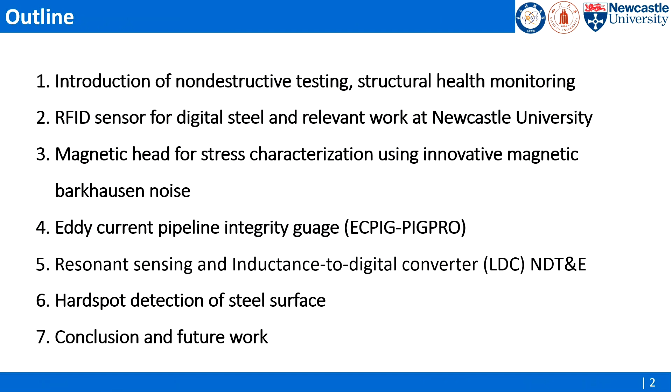So basically, NDT and structural health monitoring is probably new for this community. I will talk about roughly what this is about. I'll talk about the RFID sensor we developed in Newcastle, and then how we could use it for digital steel and the tracing and tracking of steel quality. I will talk about different electromagnetic sensors for different applications, like stress and pipeline applications, and also about metrology and NDT merged together for future quality control.

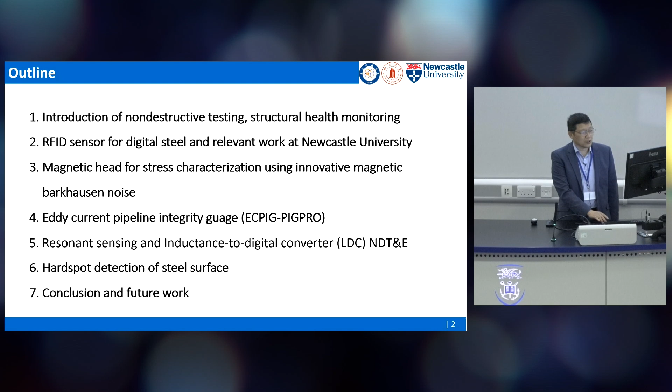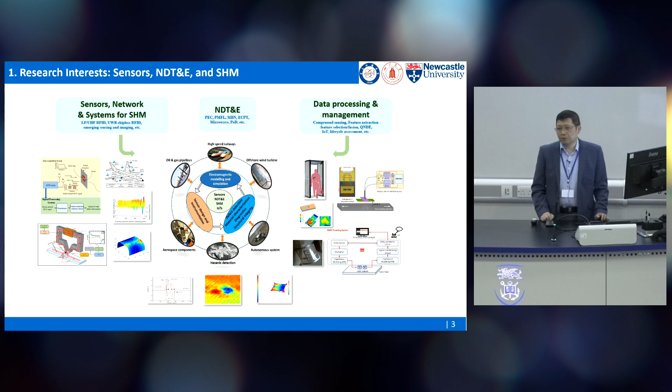So, as I said, I'm from Newcastle University. We have a sensor, signal processing and communication group. I'm actually in charge of the sensor theme. In the sensor theme, we develop different kinds of sensors for non-destructive testing and evaluation, also structural monitoring and IoT for network monitoring. After that, we develop instrumentation, modeling, and systems as well. Then we develop different applications, like high-speed railway, wind turbines, steel manufacturing, and oil and gas, particularly for power plants. As you can see, most of the end use is for metallic objects, steel in particular.

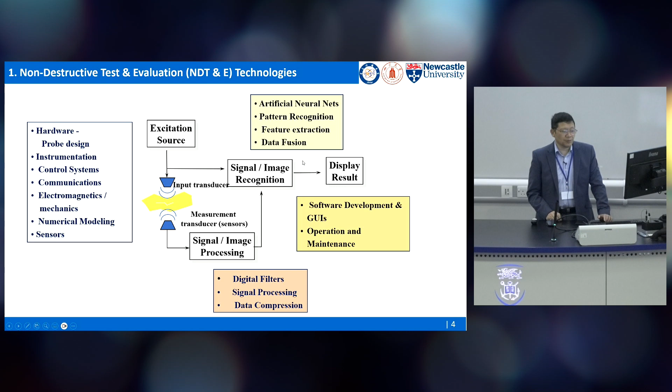So what is NDT about? If you go to hospital and have a check, we have ultrasonic, we have X-ray, we have different measurement and diagnostic systems. So it's very similar. NDT is like a measurement, with only one big difference: we have the excitation source. For example, with X-ray you have the X-ray source, with ultrasonic you have an ultrasonic source, and with MRI you have the magnetic field generating the excitation. So NDT has excitation. After that, we have a sensor, signal processing, pattern or data processing and decision making. The rest is very similar to the instrumentation and measurement area.

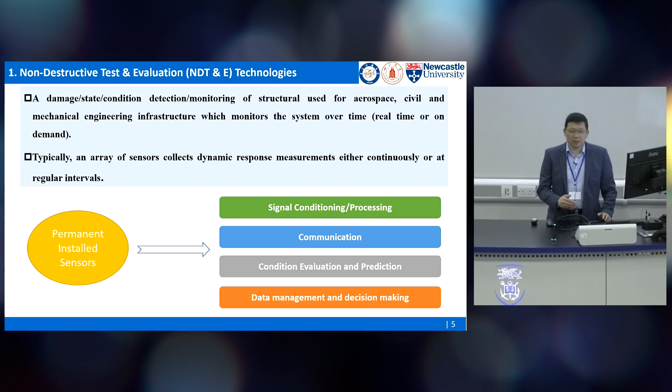Structural health monitoring actually extends NDT application to permanently installed sensors. Basically, we install sensors on different objects for continued monitoring. We could also call it in situ monitoring. In this case, we don't only have a sensor, we also have communication to send the data to the place we would like to use it.

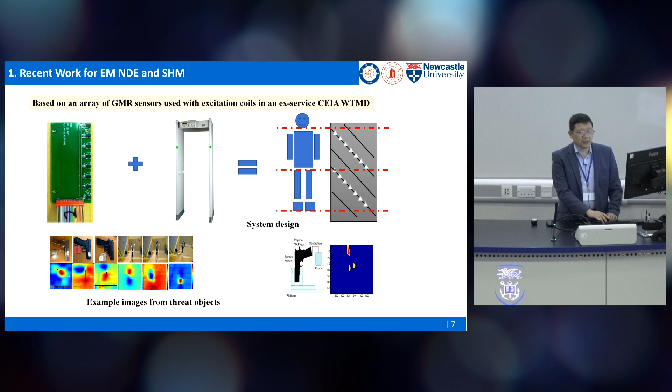One example application is the walk-through at the airport. We have the magnetic camera, and we also associate it with different metal detectors for the walk-through system. In this way, we can monitor any metallic object. So you don't need to take out all the metallic goods when you go through the walk-through system at the airport. We can just detect and localize different metallic objects and then make the right decision at the right time.

In a similar case, we can apply this to pulsed eddy current. Traditional eddy current just uses a single frequency for excitation. What we do differently is pulse, because with pulse excitation we have the time and frequency domains combined together. Then we do the measurement without defect and with defect, and use the differential signal for feature extraction. After that, we developed different pulsed eddy current sensor systems at Newcastle University. We use this for corrosion detection under coating. We also developed flexible eddy current film for complex geometric applications.

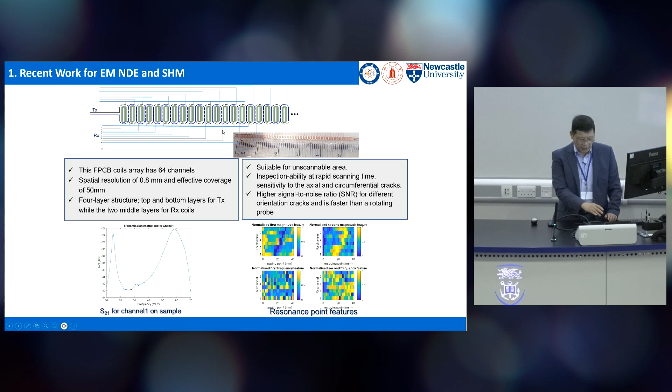And this one, as you can see, is a flexible coil film. We can measure different kinds of defects as a sensor array.

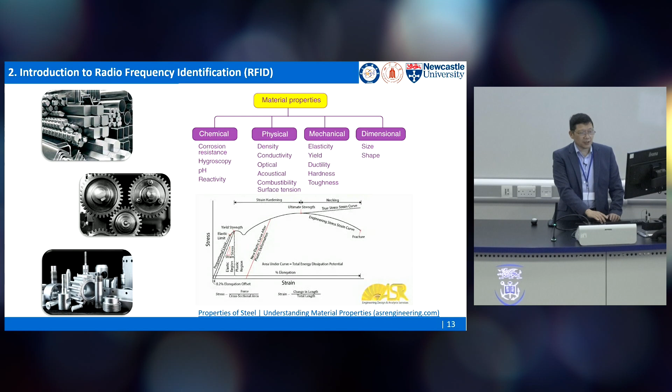One of the interesting areas I think the audience may find interesting is the RFID sensor we recently developed. For steel material, we have quite complex parameters there, physical, chemical, mechanical, or geometric information. So what we could do is develop different kinds of sensors. One of the sensors, we use RFID.

RFID is not new to everyone here. You have a bank account, you have a staff card. That's why you have two parts: one is a transponder, another one is a reader. Normally the transponder, the card we hold, is passive, no power required. When we reach near the reader, the reader coil will excite and inject energy into the transponder, and then the transponder wakes up, gets the power, and then we can use this kind of switch to get a different ID, and then we get the different identification and communication, like near field communication.

What we do differently is we try to bring these two characteristics together with sensing. If we have sensing, because the transponder and the reader coil exactly use what we call inductance or eddy current, if we extend that, we could apply this to measuring steel property. And then we also can stick a transponder with steel material or with a sample for tracing the supply chain and tracing manufacturing. So if we put it this way, we have different applications.

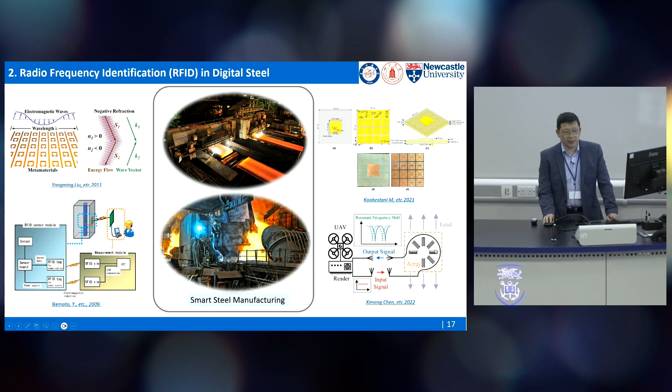For example, we could use a metamaterial with print and coating on steel material or steel sample. We also can design different RFID sensors to do stress measurement. One of our applications in Newcastle uses a quite wide range of different RFID frequencies. We do corrosion detection under coating using low frequency RFID, high frequency RFID, or even ultra high frequency RFID for different sensing applications.

One recent approach is we also try to use commercial off-the-shelf components. Basically we can purchase RFID components on the market, and then this kind of flexible RFID device we can stick onto steel material. As you can see, we can have different shapes, sticking with steel material. In this way, we can detect the coating condition and corrosion condition. We also can measure the steel material property, and in this way we can get a digital mark for the steel material.

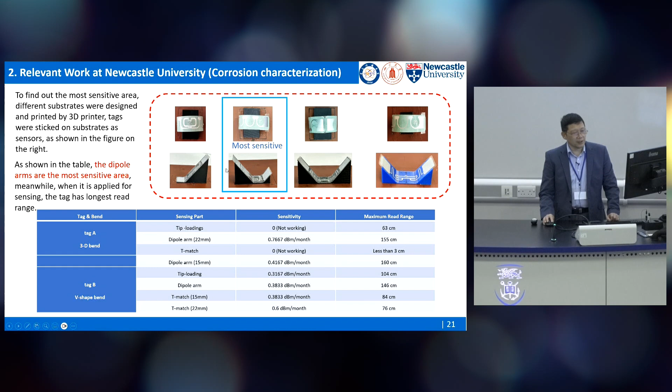So this one, as you can see, we purchase this kind of RFID flexible device from the market. We just design the electronics and do the data acquisition remotely, and then, depending on the communication distance, we can get different sensor information.

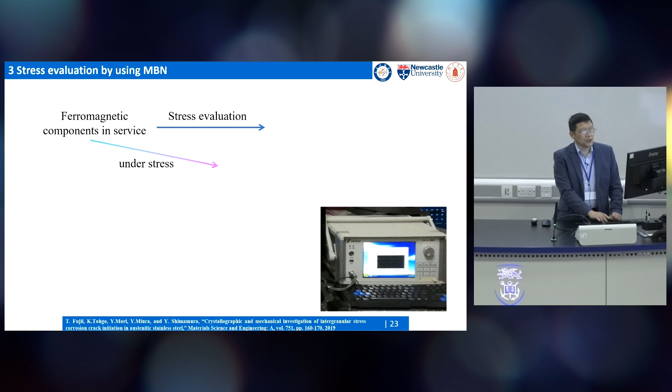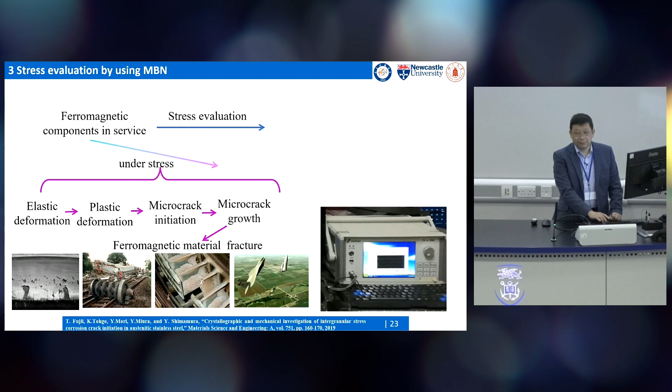We also can apply magnetic Barkhausen noise for stress measurement. So we developed one instrumentation system using magnetic Barkhausen noise, just measuring the elastic or plastic deformation, measuring microcracks or microstructure, and in this way we can measure the steel material property. This is a typical electromagnetic probe approach here.

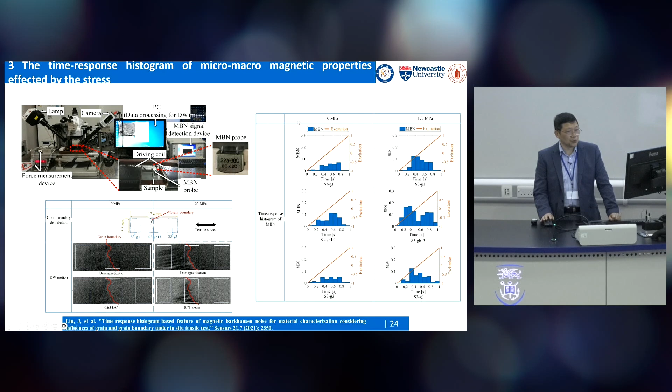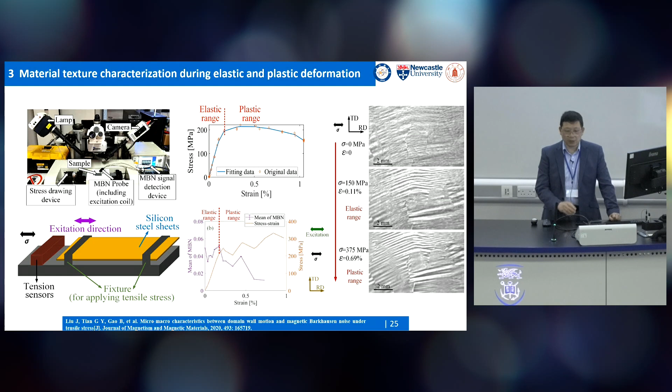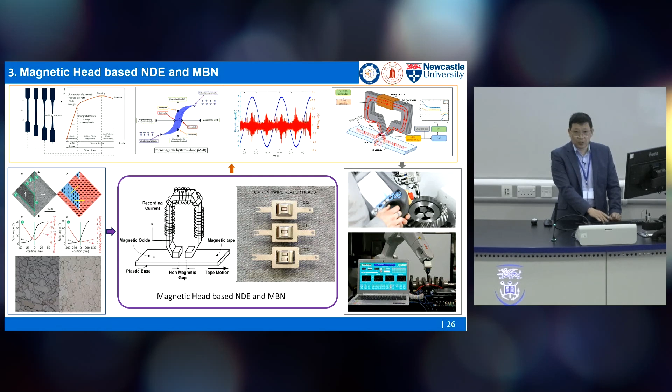So what we did, first of all, we changed the traditional way to design the probe. We didn't use the simple yoke and sensor system; we applied a magnetic tape-type head. Previously, some people can probably remember this kind of tape head, which gives a very tiny reading area. In other words, we can get a high spatial resolution to measure the stress, because stress actually has both macro and micro stress there. In this way, we can improve spatial resolution and get the measurement right.

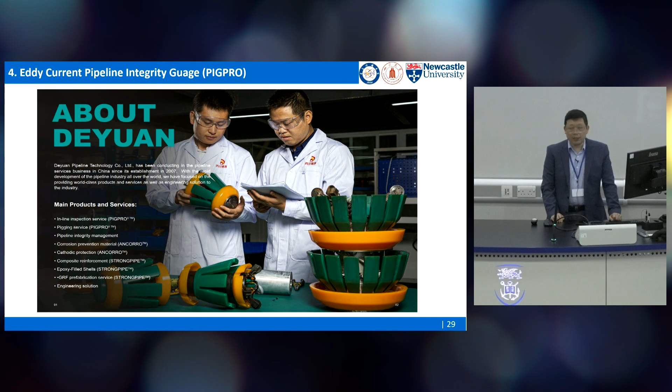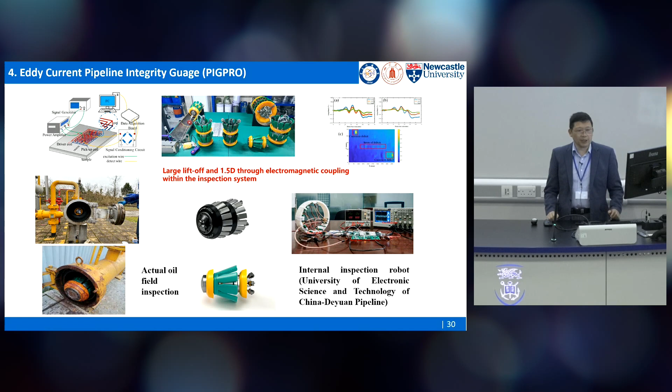Another one, we just use eddy current pipeline integrity for pipeline measurement. This one is about operation and maintenance. I'll show you this one is a spin-out company we're working with in China, and currently we've already measured globally around 150 pipelines. What is the beautiful part? Because the eddy current pipeline tool can make the pipeline integrity inspection device much smaller. And this is the application there, so probably I'll show you the video.

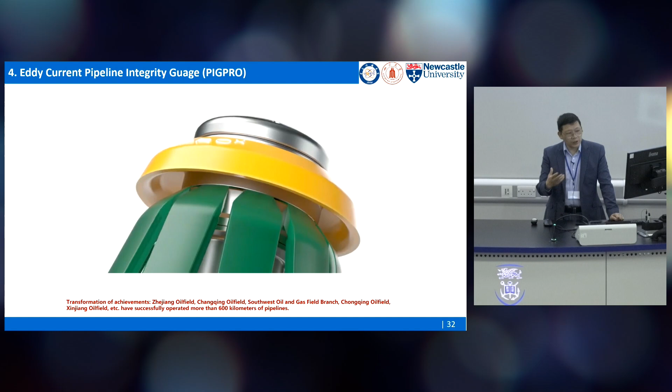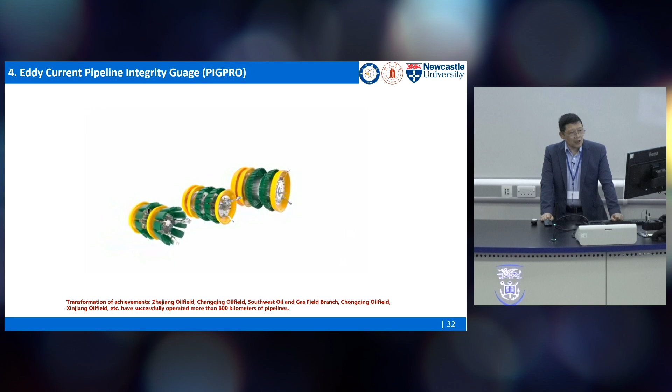The traditional approach uses magnetic flux leakage, which is a big system, and that's fine for long distance pipelines. But for branch pipes, the pipeline is small, for example less than half a meter in diameter, so it's very difficult. Then we use eddy current, which gives us very good sensitivity and a compact system.

The benefit is that eddy current sensors offer higher sensitivity and signal to noise ratio. They can detect inline defects including inner metal loss, abnormal welding, cracks, pinholes, deformation, and illegal taps, etc.

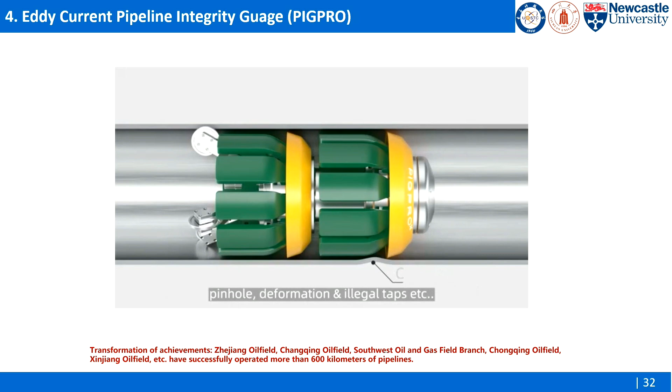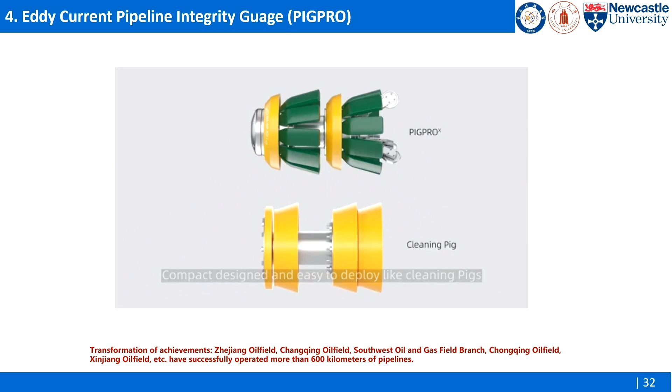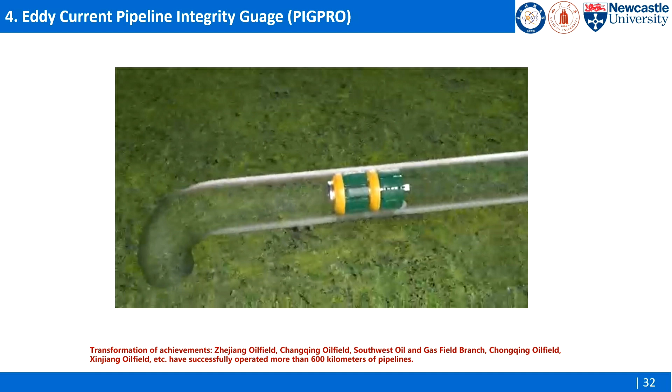It has a compact design and is easy to deploy, like cleaning pigs. It can be deployed using non-standard, standard, or temporary launchers, with valve launching. It can pass a 1.5D bend, so even with this portable system it can still measure, or with a 20% deformed pipeline.

It can be driven by as low as 14.5 psi pressure difference, with an ideal running speed ranging from 0.1 meters per second to 8 meters per second. It suits conductive pipelines, including carbon steel, stainless steel, and bimetallic composite pipelines.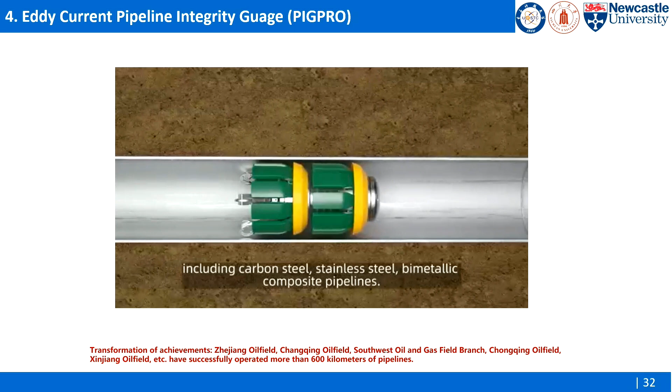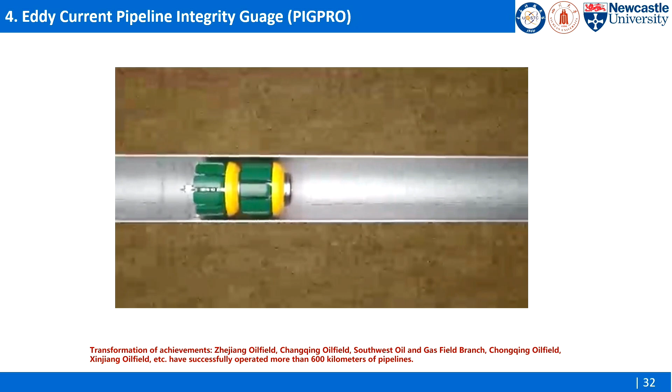We can also track the pig system in the pipe and get location information. Then after finishing the inspection, we can take the data out for decision making.

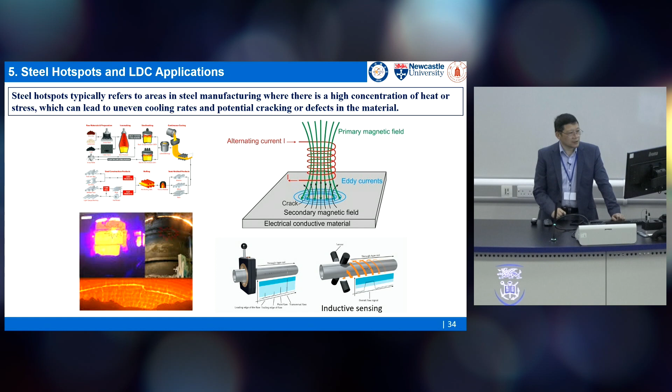So I think we've shown you about the non-destructive testing using the eddy current approach. We can also extend the eddy current approach with a chipized system. One approach uses an inductance-to-digital converter. As you can see, for pipelines we have different kinds of electromagnetic sensors. Later on, Carol's group and Dr. Zhou will talk a bit more about their practice.

One approach extends the eddy current using a resonance system. Basically we have the air inductance connected to an oscillator, and this way we can digitize to do the work. This actually goes back quite a long time, 30 years ago, when I was a young lecturer in China, we got the first patent for this kind of digitalization. By coincidence, after 30 years, in 2013, Texas Instruments developed this kind of approach using IC chips, which they call LDC, inductance-to-digital converter.

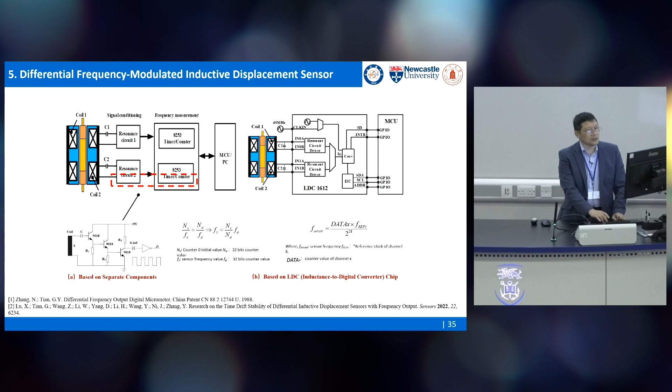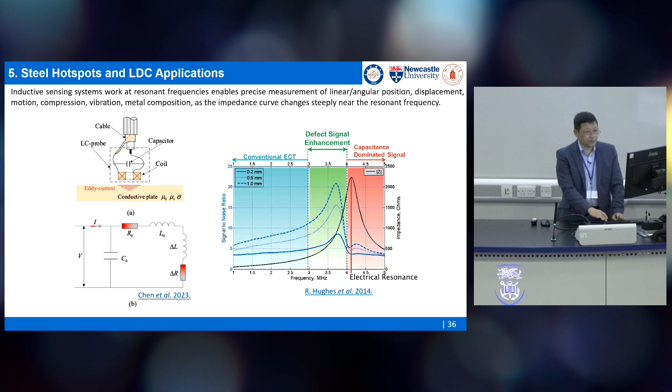So recently what we do is use this kind of chipized device to develop a displacement sensor, basically measuring the gap between the probe and the steel sample, and also measuring the defect combined together. This way we get multiple functions, but overall the approach just uses one LDC device to do the job. So this is one application.

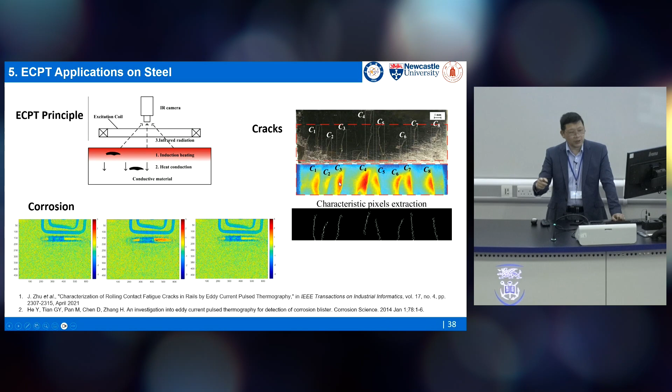Another approach, rather than using a magnetic sensor, we use eddy current to heat the sample, to measure the thermography, and to measure the eddy current distribution for different applications. For example, we can apply this for high-speed railway to measure the rolling contact fatigue of rail track.

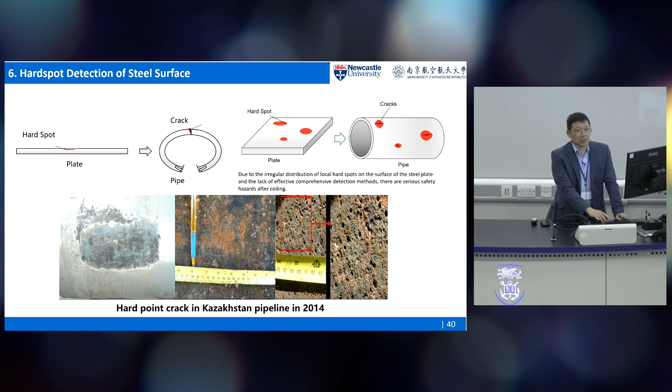So finally, we integrate different approaches to tackle a big problem, I think, for the steel industry: hard spot detection. Hard spot detection is actually very difficult, because this kind of defect or stress concentration is quite small. How can we do that?

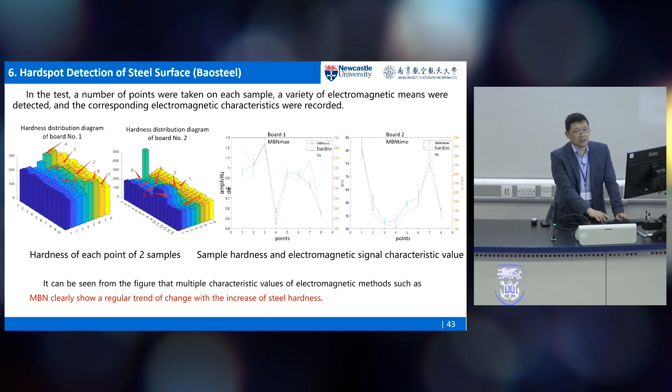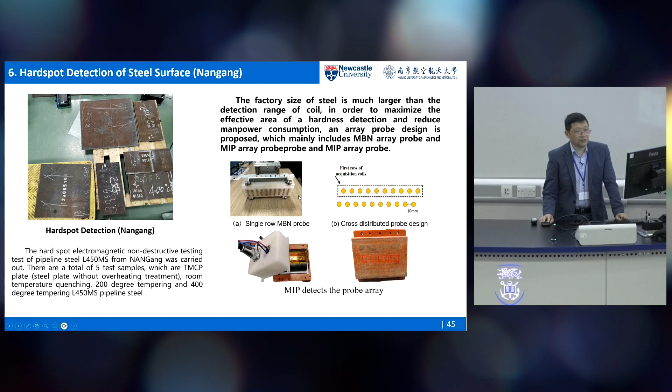Again, we use, as mentioned earlier, high spatial resolution probes and sensor arrays, and with different combinations we can use magnetic Barkhausen noise combined with eddy current, and design different sensor arrays for different applications.

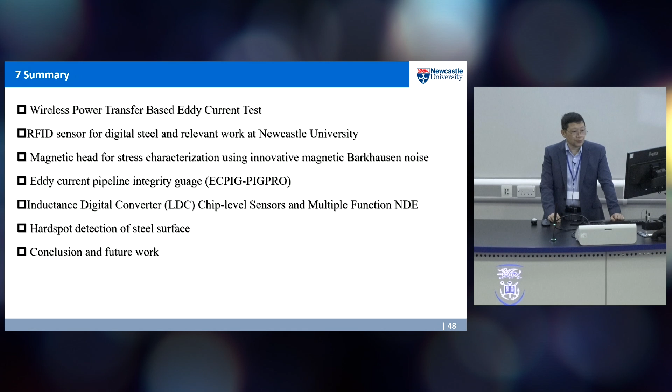So quickly, I'll show you the different eddy current probes we use for different applications, not only for sensing themselves but also including communication, using wireless power transfer communication. We also apply different magnetic principles, including magnetic Barkhausen noise, domain wall tuning, and we extend to multiple function sensors including thermography and resonance sensors for different kinds of measurement: defect, microstructure, and stress measurement.

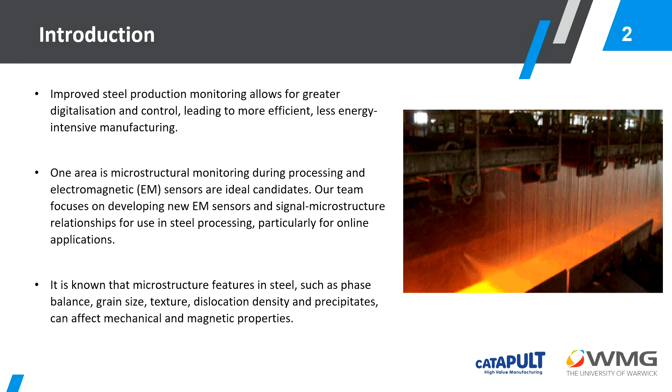So in my talk, I'm going to focus on how we use smart sensors for microstructural control during steel processing. I think Claire has really covered the introduction very well — the importance of the sensor is about making the steel products right the first time, knowing more information about the product, and enhancing quality control.

We know that the steel grade is achieved by engineering the microstructure of it. And in the steel mill, we're trying to adjust many different processing parameters in order to get the right property the first time. Electromagnetic sensor is one type of sensor that we can put in situ at high temperature during steel processing and have access to some microstructure information.

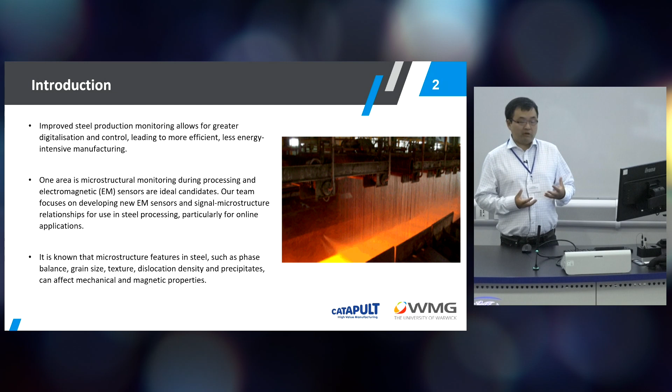We know there's a lot of link between steel microstructures and its magnetic property signals. What I've got here is a typical hysteresis curve of a ferromagnetic material. We all know that the majority of steel, especially structural steel and electrical steel, are ferromagnetic, so they have these magnetic properties.

To start with, the steel will have a demagnetized state. Even though it's ferromagnetic, it has all sorts of domain structure built into the structure of steel. We've seen plenty of microstructures yesterday, but there's also domain structure — you've seen some of that in Tian's talk.

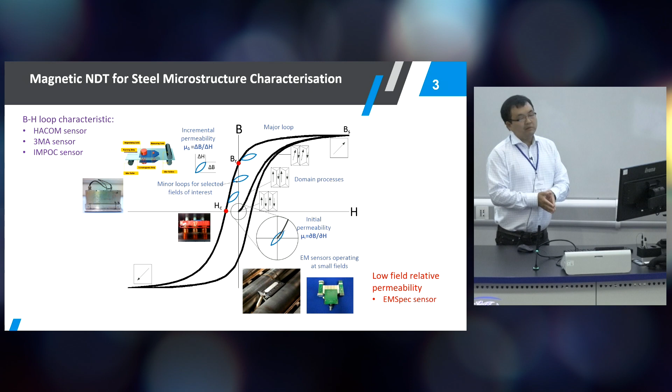What happens is when you apply an external magnetic field, the domain structure starts to move and the domains start to align with the external magnetic field. And of course, when the domain wall is moving for the domain alignment, the domain wall can interact with microstructure features. This is why microstructure and magnetic properties are linked to each other.

If we magnetize the sample fully at a very high field, achieve saturation, and then relieve the magnetic field, the steel actually comes back at a different point. Sometimes when a piece of steel is close to a magnet for a long time, you have some remaining magnetism there, and we call that the remanence point.

And in order to get back to zero field in the steel, we have to apply a reverse field to cancel that. So what I'm trying to show is when you apply this magnetization process to a piece of steel, it undergoes quite a different process of domain wall movement and domain arrangement. If you record how B and H, the magnetic properties, change during this magnetization process, you can then infer the microstructure of steel.

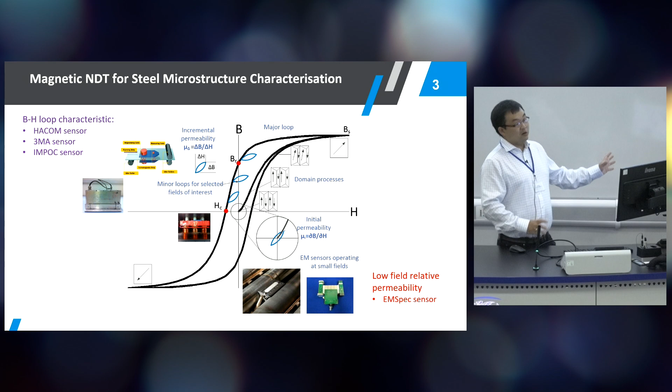There are different techniques that apply different field strengths to look at steel microstructures. At a cold environment, we have in situ cold rolling mill strength verification sensors. Commercial sensors like 3MA, HACOM, and the IMPOC sensor all apply a very strong magnetic field, trying to magnetize very locally the steel sample, and then measure the magnetic property at that point and correlate that directly to the mechanical property of steel.

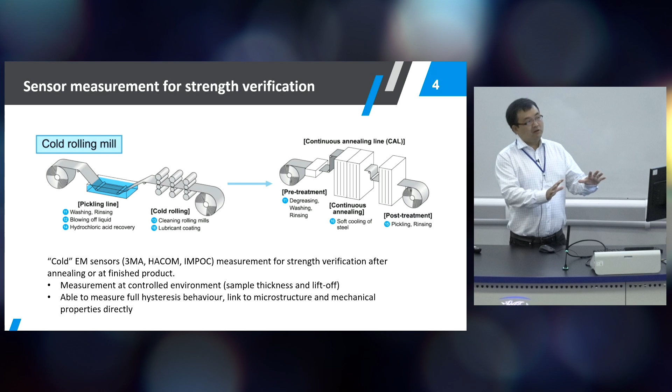So it's very popularly used to link directly with things like tensile strength, yield strength, and increasingly R values. It's a direct kind of empirical relationship, because anything that strengthens the steel will also weaken the magnetic properties. So there's some correlation there.

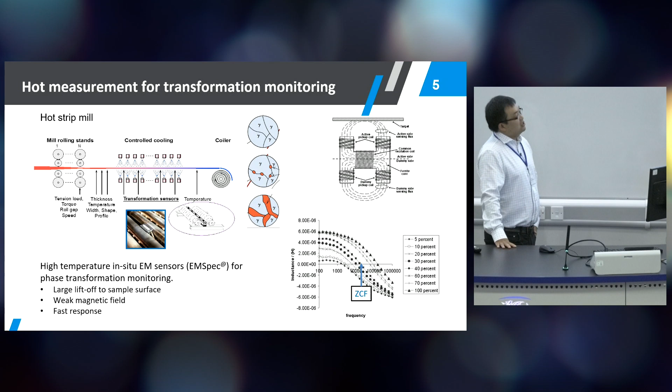What we have researched at WMG Warwick is the online in situ sensor at high temperature. Here we're talking about a temperature range somewhere between 800 down to maybe 400-500, which is normally where the structural steel transformation is happening.

There we face the application challenge of electromagnetic sensors, in that we can't place the sensor too close to the steel sample because of the high temperature. Also, the other difficulty is the steel strip or other shape of products will move on a continuous line, and that will introduce more noise to the sensor signal.

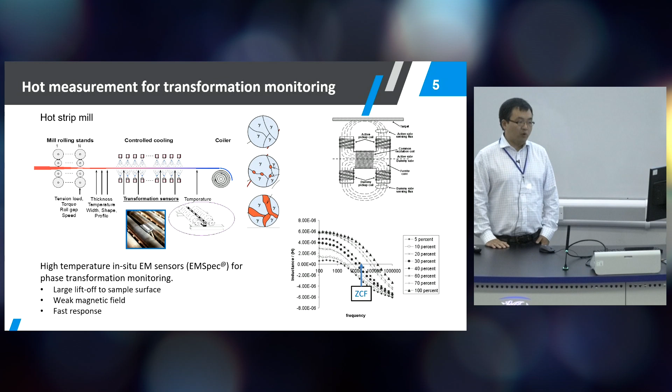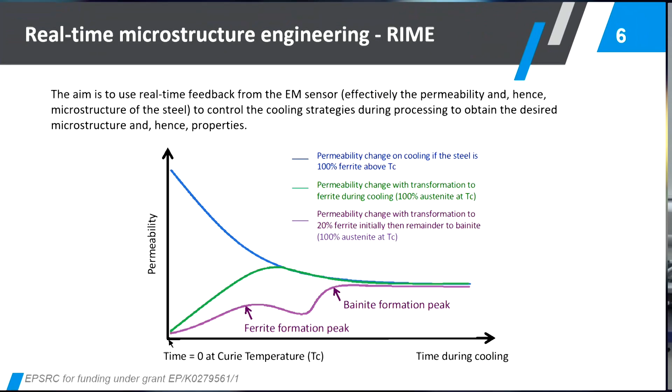So instead of using a very high field sensor, we are using a weak magnetic field sensor, and we then look at a very specific part of the sensor result and interpret what is the microstructure state at that time. So I love this diagram because it really shows the concept of how the sensor can work for microstructure monitoring.

So two things can change the magnetic permeability of the steel. One is its microstructure, and the other one is temperature. So we know that there's a famous temperature called the Curie temperature, because above the Curie temperature, the steel loses its ferromagnetism. So everything is paramagnetic, and you see a very small signal from the sensor.

However, passing the Curie point, if you have a steel product that has already transformed before this Curie point, which in steel is around 770, then imagine that during the cooling of that steel product, you will all of a sudden get a very strong signal at the Curie point, because the material has already transformed. It should be ferromagnetic. It's just waiting for that temperature to get below the Curie.

And as the sample gets cooled, you then see that we have a decrease in the signal, and that's simply because the permeability is decreasing with temperature. So that's if you have a fully transformed microstructure state.

However, if you have a steel grade passing the Curie point and it hasn't transformed, then you start with a very low signal. So following the green curve, you can see that we have almost no signal at the Curie point. So we know that it's already passing the Curie, but there's no signal. It means the transformation hasn't taken place yet.

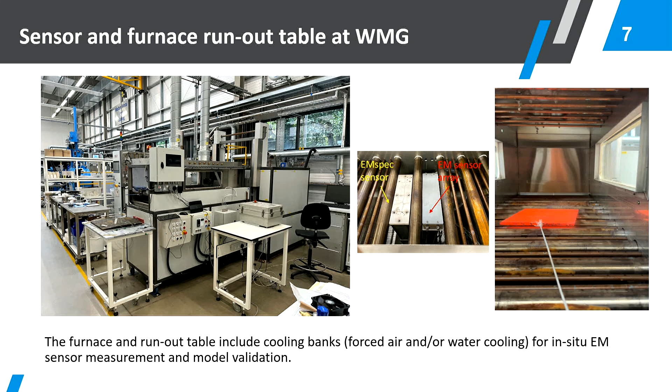So what we are trying to do there is we heat the sample up to a certain temperature. We bring that sample out, and we actually stop at where the sensor is, and to make sure the roller is still functioning, we sometimes move the sample forward and backwards, but the plate is still on top of the sensor, so that we can record how the sensor signal looks when a steel sample is cooled.

And of course, in an industrial application, we can't do that, because the steel strip is running continuously past the sensor. So you are having a snapshot of a temperature or a position, but if you have multiple sensor heads, they then record the transformation behavior.

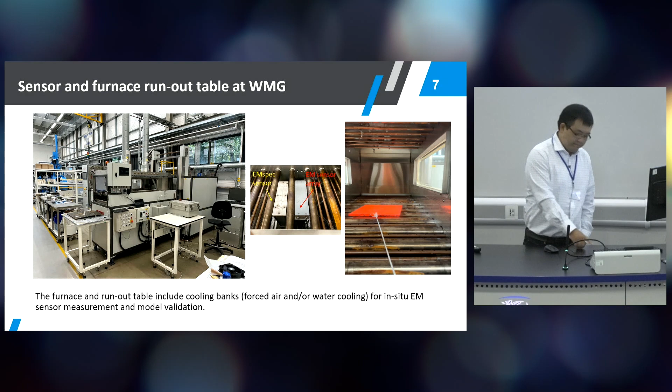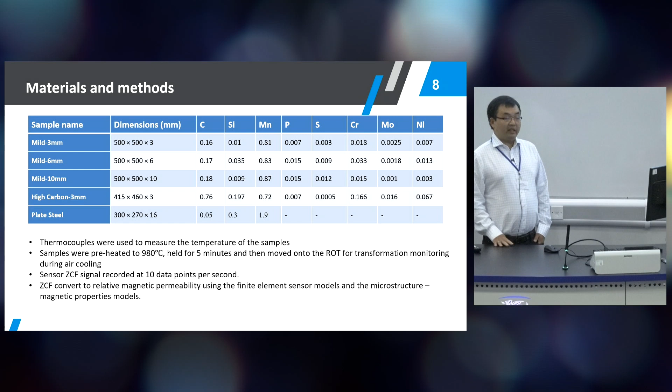So we have got some samples here. I just want to show you some of the results that we have from the lab-based sensor, but the sensor is exactly the same as we have installed in an industrial mill. So what I'm going to show you as a few examples is some mild steel with different thickness, and then a high carbon steel, and also a commercial steel plate.

So if you look at the 3 mild steel samples, they have very similar chemistry, which means that they should share the same CCT curve, etc. However, if you cool them, you will see that the transformation behavior is showing up on the sensor signal. So we have 3 different sample thicknesses, which are 3, 6, and 10 millimeter, and of course the cooling rate in air will be different.

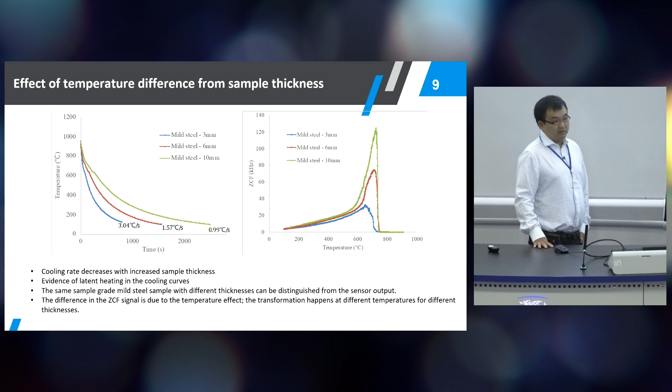So there is some discrepancy there, but after we cut out the sample and look at the microstructure, we do see bainite transformation, and that tends to agree more with the sensor in this case. But it just shows that the sensor measurement, the model prediction, and the dilatometry measurement can all measure phase transformation, but they have their own differences as well. So it's all different and giving different information.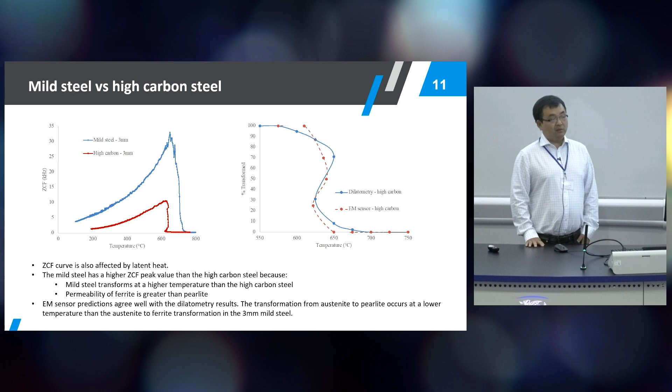So I think that's where we are, and I think the sensor technology that we have researched for many years now has been really lucky, and we have installed some sensors in Tata Steel in IJmuiden and now Tata Steel in Port Talbot.

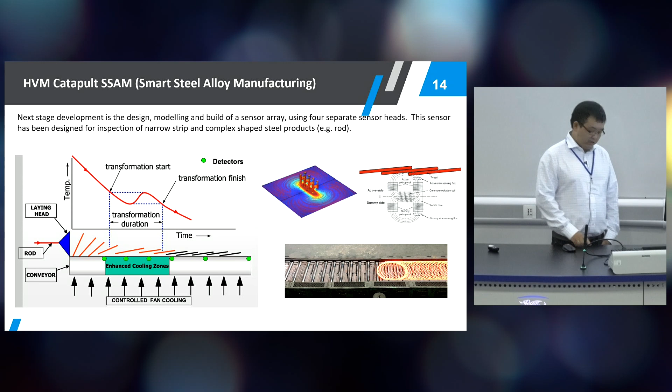The other benefit of having a few sensor heads across the width in this situation is, as you can see, when the rod is coming out, the different density of the layout of the steel means that the cooling rate could be different at the center or near the edge. So different sensor heads can potentially pick up when each different location starts to transform, because you want to control the cooling rate so that the transformation is uniform in a rod application as well.

So a lot of that is focused on phase transformation, and another area that we have done some feasibility in, and we also believe is a great sensor application area, is to apply the electromagnetic sensor technology for annealing applications. So in this case, we have an interstitial free grade, with cold rolling followed by annealing, where recovery and recrystallization happen. There we have also measured in situ the steel recovery and recrystallization process in a furnace where a steel sample is positioned within a sensor tube.

The other application we tried this type of sensor for is rod steel. So this is the pearlitic grade where we deliberately wanted the pearlite to fully spheroidize. There are heat treatments specially designed to achieve this microstructure, and currently the industrial partner is soaking the material for a period of time, but the sensor can potentially look at how the signal changes. In this case, we can see when the microstructure is changing from pearlitic structure to fully spheroidized structure.

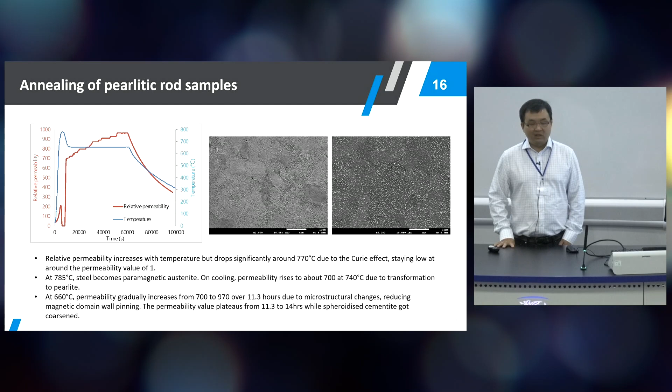So I hope I have given you a flavor of some of the electromagnetic sensor applications for steel processing and microstructural measurement, and some of the areas that we are starting to look at as well.